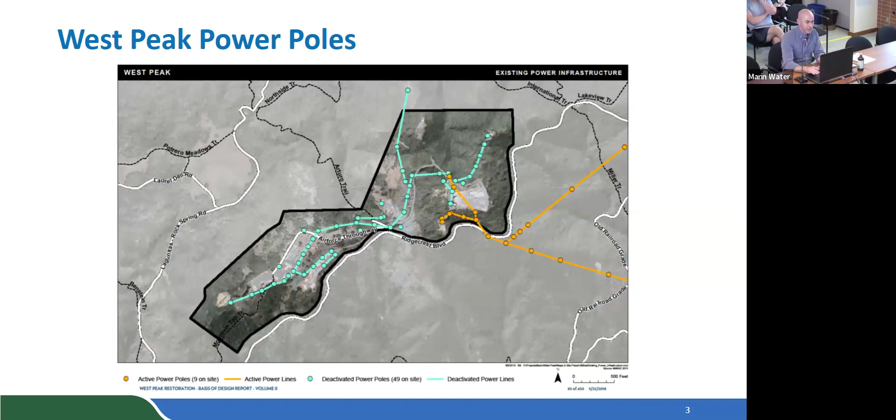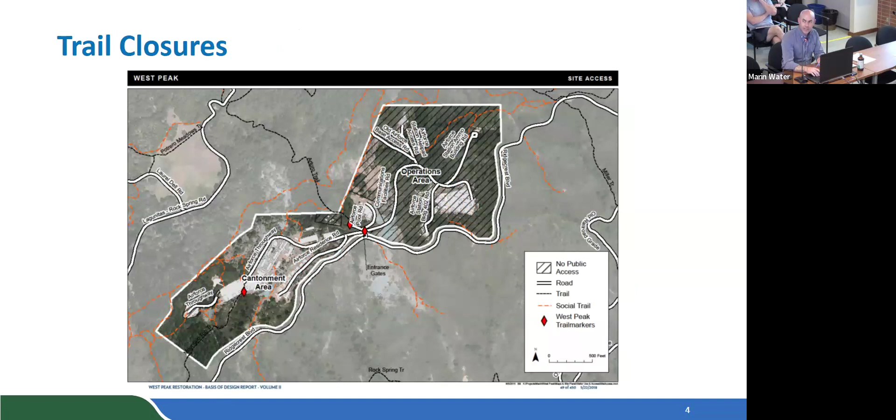Due to scheduling, we had to look at doing it on weekends in order to get it done as soon as possible. This site's been closed though, because there's a number of trails. They're kind of hard to see, but the black dashed lines are trails that go into the West Peak site. The red-orange hashed lines are actually social trails that people also use to go in and out of the site when they're exploring up on top of the mountain.

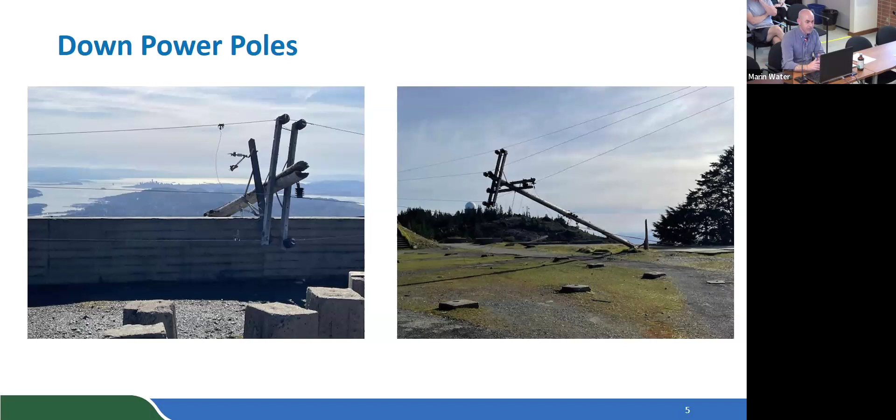Due to those wind events, we had a number of these poles come down. This is really old infrastructure that's been up there for a long time. A lot of these poles are just failing in the middle—they've rotted out. They really need to go.

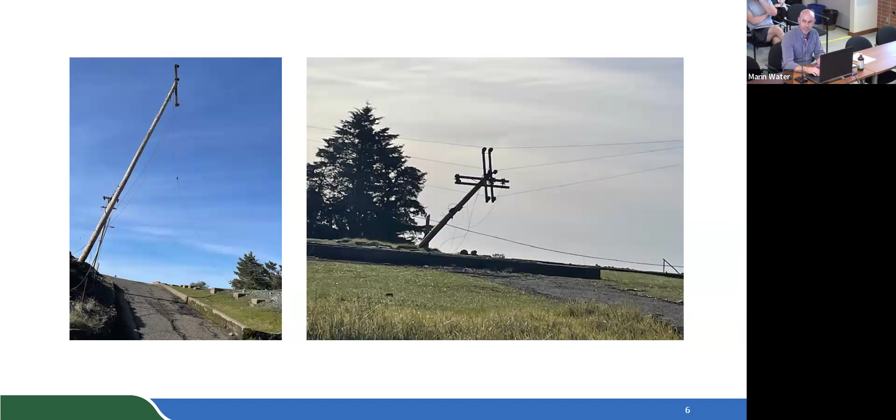So we have a number of down poles and others that are teetering on becoming down, and all of this infrastructure is kind of a tangled mess up there right now. We're trying to move forward with the repair to make this site accessible again to the public and make sure we get this infrastructure and hazard out of the way as soon as possible.

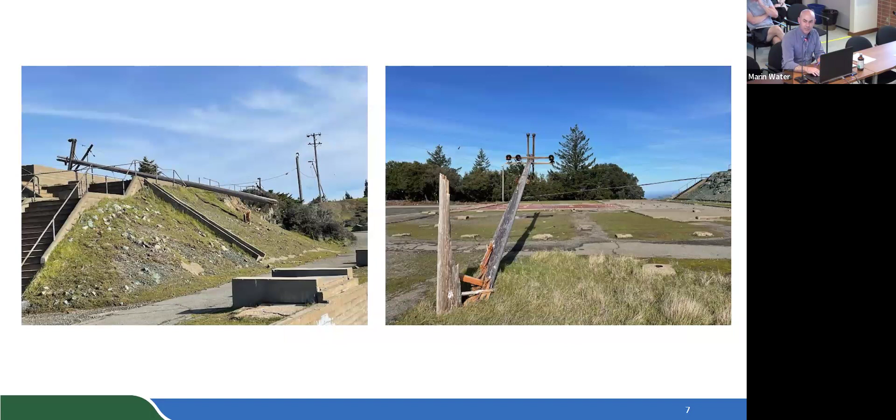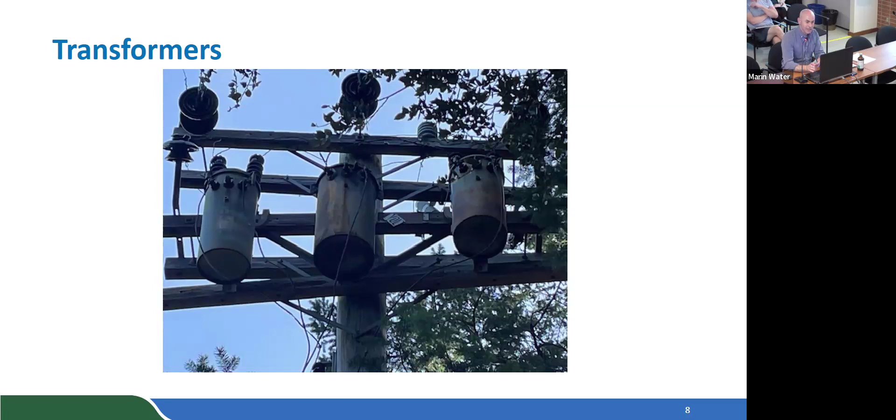There are also transformers that we're going to have to deal with that are beyond what the contractor removing the poles can handle, because of the hazardous nature of the chemicals used inside the transformers. So we're looking to contractors that can actually come and transport and dispose of those accordingly.

The schedule for the project right now is to start on Thursday with the removal process. It's going to take two crews initially removing it, and then following up on the March 30th weekend to complete the removal. We're hopeful that those two events will get all the power poles down, all the lines wrapped up, and the transformers secured and placed in a secure spot until we can get a contract in place to remove those permanently from the site.

We're also working with the contractor to see if they can sub-consult with another contractor to help with removal of those features as well. So there are a couple more steps until that site is open again: soliciting proposals for the transformer removal, and then contracting and scheduling that work to be conducted.

So with that, if you have any questions about the project and what we're trying to do with this contract, we can answer those. Otherwise, as I mentioned, this is an action item requesting that we adopt the resolution to allow us to utilize the emergency contracting procedures with Pinnacle Power Services.

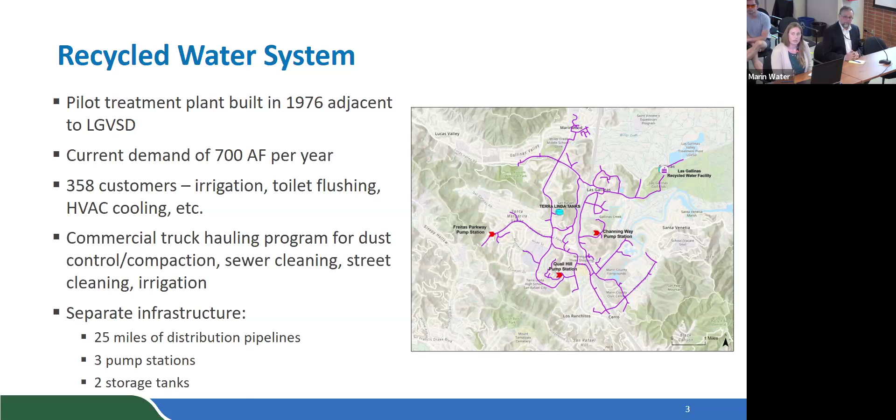Ways to expand the system from the existing 25 miles include first infill, adding new customers within that area. Sometimes opportunities come up with customers adding to the system or changing their use, and we find ways to transition them to recycled water. Other opportunities involve expanding the recycled water system through a phased or project-based approach, beyond the bounds of our current system. Lastly, we could add a new recycled water system centered off a different treatment plant—right now we're centered off Las Gallinas, but it could be through Central Marin or SASM down in Mill Valley.

For infill, do we have available capacity? Yes, we do. With the new recycled water facility that Las Gallinas upgraded, we have quite a bit of capacity that they can produce from their treatment plants, and we're able to meet any infill demand right now.

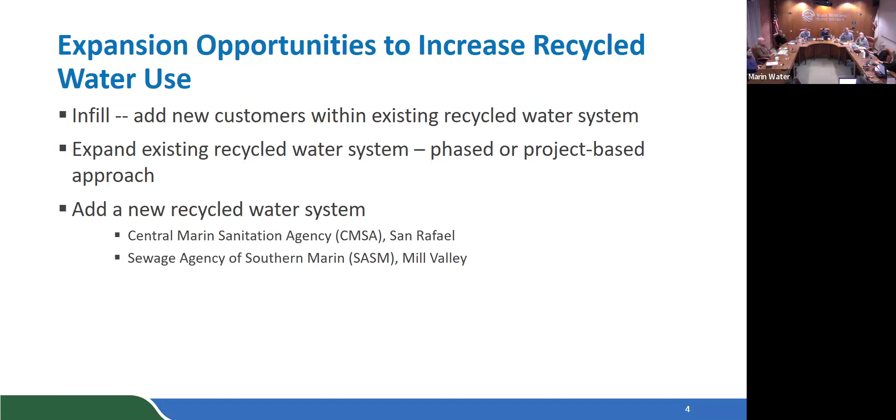Our partnership with Las Gallinas has been ongoing since our inception in 1976. In addition, we're always looking at ways to expand the system using other wastewater facilities in our service area. We partnered with SASM, the Sewage Agency of Southern Marin in Mill Valley, in 2014, and with Central Marin Sanitation Agency, CMSA, in 2015 and 2022, to conduct feasibility studies for recycled water and identify the most cost-effective projects in those areas, building off their treatment facilities. We continue to look for opportunities to expand the recycled water system, mostly through leveraging grants and these partnerships with wastewater agencies.

So there's infill within our system, or there's also starting to look beyond. Phased expansion is one approach we've looked at over the years, growing through phases to become more cost-effective in how we expand the system.

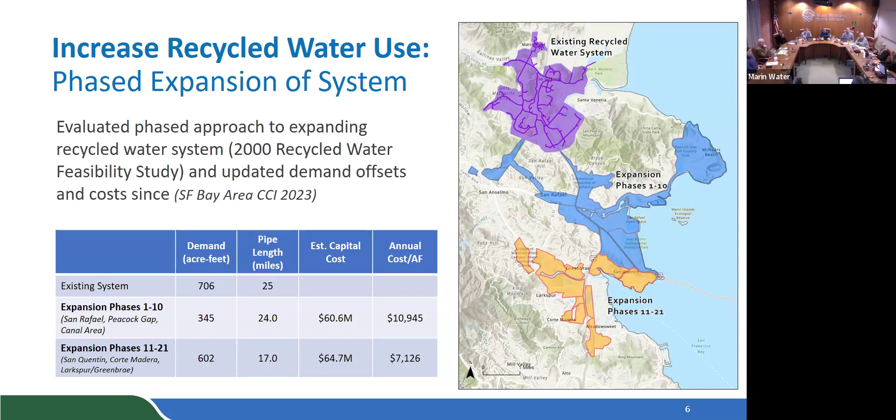So what we see is that it's expensive, due to the residential nature of our county, to expand beyond the boundaries of where our system is right now. But we continue to look for opportunities.

So another way we go about it is by looking at specific projects.

Lucy, another interruption—I always get confused on the calculation of annual cost per acre foot. So the capital costs are being amortized over the lifetime of the system, and you're also including the operating costs? Correct. Over 30 years, I think at 3.5% or so, based on what we would expect we could get. Thank you.

Is that assuming the causeway that the park people asked for? No, that ended up being the most cost-effective option that they looked at in that design study, I believe it was West Yost, and the most cost-effective one ended up being going through Central Marin and then over along San Pedro. That was because they could pick up the most users. I think the causeway ended up not being feasible because the state park said they wouldn't allow for it. I thought they were the ones that asked for it to avoid the Indian burial. They liked the idea of the causeway, but they were not so keen on us going overland to the Peacock Gap tank that we proposed to use. So there are some mixed messages there.

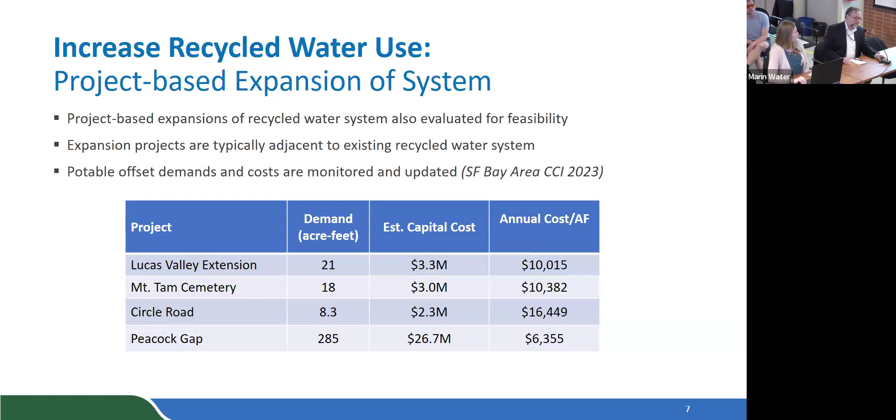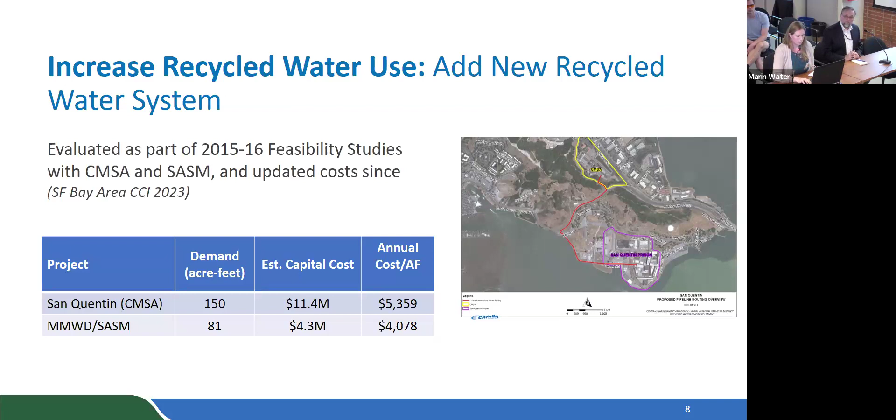So bringing all of these together, what you can see is there's definitely the possibility to expand and increase recycled water use. But it comes with a cost, with very expensive capital costs to do these projects. And they're very supply limited in consideration of the water supply roadmap that we're working on and the supply demand that we're looking for overall.

And so that's also why we're starting to just keep in mind the future of potable reuse. So with potable reuse, I'll step into a brief overview: there's two primary categories. There's indirect potable reuse, which is the planned use of recycled water to replenish drinking water supplies, but using an environmental buffer. That primarily comes through either a groundwater basin as the environmental buffer or a surface water reservoir as the buffer, and it's held with either a dilution or an amount of time where it's put in that buffer. For us in Marin, there are no available groundwater basins that seem feasible, so we don't see groundwater recharge as a good option. But surface water augmentation is an option to look into.

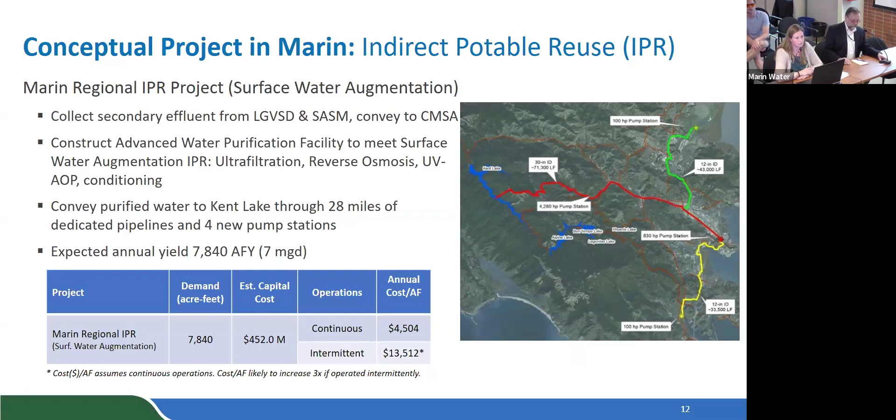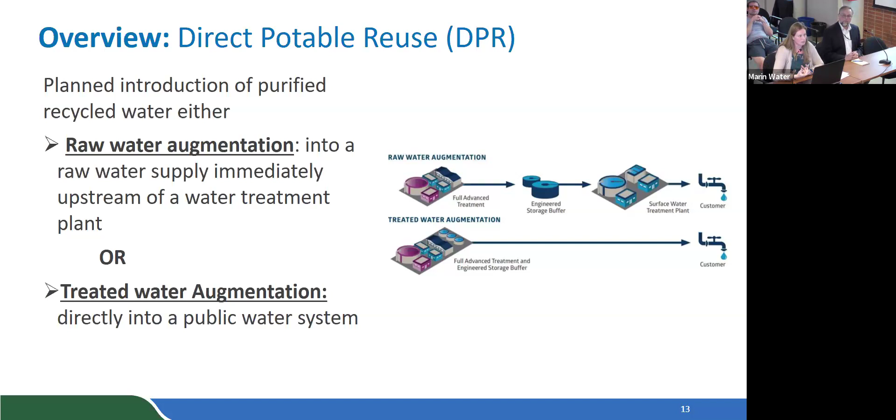I tend to think of DPR as treated water augmentation more directly, where it's put directly into the distribution system. But there's also raw water augmentation, where it's put into a raw water supply immediately upstream of a treatment plant. The graphic on the side shows it as well, and either of these have been evaluated for Marin.

When I came in November for the ops meeting, the draft regulations were underway and they had a public comment period. The California State Water Resources Control Board adopted the regulations in December, on December 19th. They were estimating at that time the effective date would be the second quarter of 2024. There hasn't been much updated on the website yet, so we'll see where it goes, but I expect it'll take some time for them to get caught up.

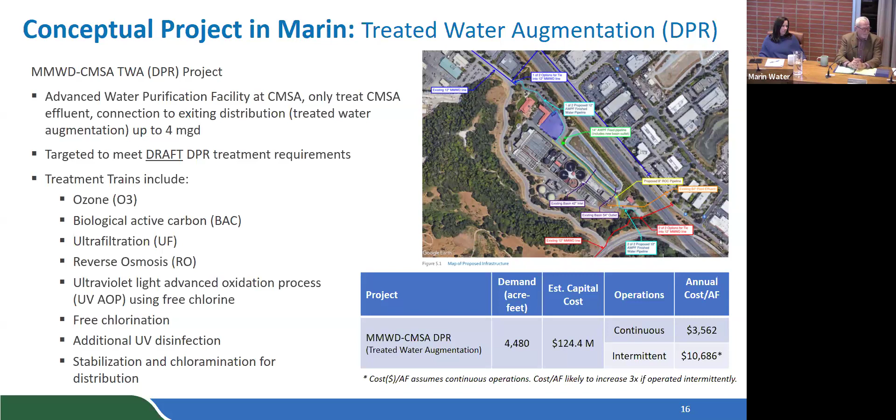So in summary, expansion of Purple Pipe is definitely possible and comes with costs. It's capital intensive, and from what we've seen, it's supply limited, mostly because of the way our community is built, with it being highly residential, and we don't have any large anchor tenants that are industrial.

And then with potable reuse, those opportunities down the road will be cost intensive and extremely complex, but will be interesting to see where it goes from here. So where we stand is we look forward to continuing to monitor the regulations and larger agencies, as Ben mentioned, and see how the regulations may change in a few years, and where we end up down the road, and what our options are in the next few years.

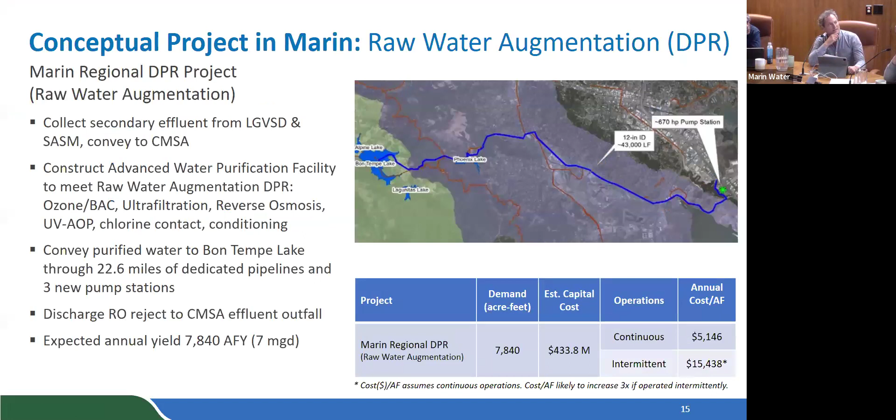Can you pull up the slide where you showed the options for IPR, that had about 5 or 6 different considerations and the approximate cost and annual cost? For the tertiary, the expansion of the purple pipe, I think it's like that one there. Yeah, so as I'm looking at these considerations for us to continue to research,

and given our water roadmap that we have approved to continue to look at this, and especially to find new grant money, I am supportive of us pursuing the SASM effort, that we can look into how those customers, whether Mill Valley or SASM, could potentially benefit and potentially contribute, whether there might be additional state or federal funds to help us do that project.

I think the costs that you have here are more expensive than some of the other options that we're looking at, but they also don't necessarily take into account insurance against drought, where we were scrambling before and coming up with extraordinarily expensive solutions, and may not take into account other additional infill expansions that site has beyond Friends Field and Bayfront Park, potentially to the Redwoods, which is nearby, and other developments, or the high school, which is also not that far away, which has some big fields, which I do not believe was using it.

So I do think there are some further explorations that we could have here, and I would like us to make some efforts to continue our recycled water work. I also think there might be interest in San Quentin and Peacock. I think there could be opportunities in Peacock in particular, for public, private, and other nonprofit support for that effort that may reduce the costs. And I wouldn't mind us reopening those conversations, which I think could be mutually beneficial for a lot of people, potentially the canal as well.

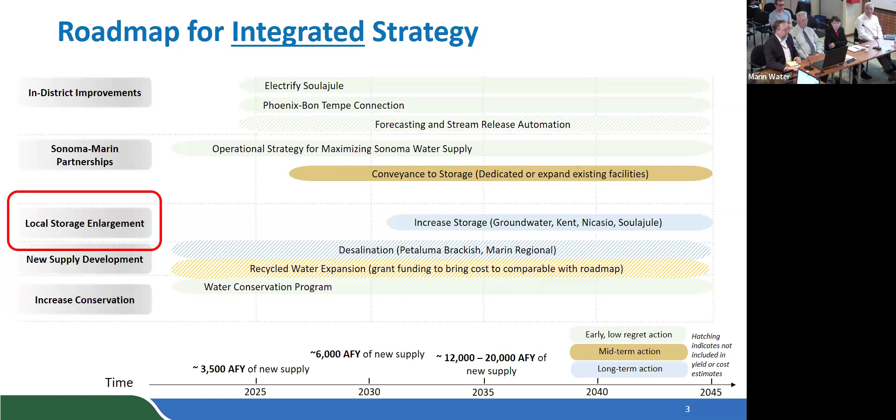I know folks may be watching online or attending in the audience, and even though I'm not talking about many things we're doing right now, in the interest of time, we're going to focus on this local storage enlargement. But I assure you, water conservation is first and foremost in our minds, even though it may be at the bottom of the slide. We just heard a presentation on recycled water and the board's comments on partnerships, grants, and game-changing things needed to move those projects. We are interested and moving in all areas on the roadmap as quickly as we can. So with that, I'm going to pass it over to Guylaine to walk us through the next couple slides.

Thank you, Paul. There you go. Thank you.

Thank you, Paul. If you recall, the process we're going to go through for local storage evaluation is first we are going to define the alternatives as described in your strategic plan, but define them to the point that we can screen them down to 3 or 4. Then we'll further develop these shortlisted alternatives to conceptual design, and based on that, we'll come back to you with a proposed preferred alternative for design.

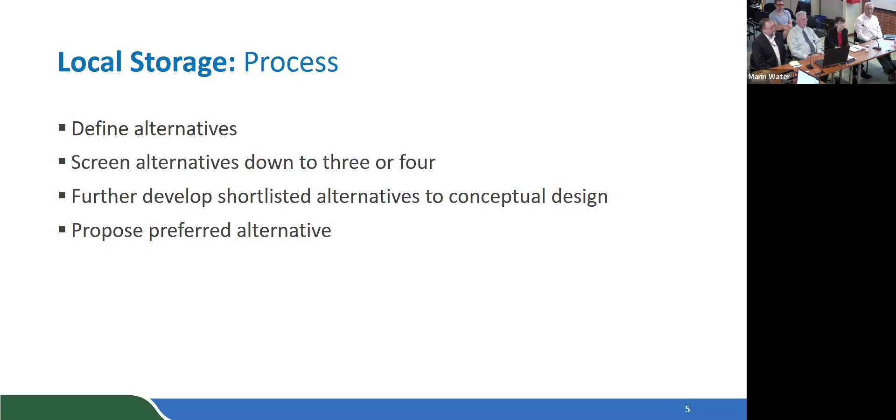In terms of progress to date, as I mentioned, we are defining the concept laid out in the strategic water supply assessment to feed into screening the alternatives down to the top 3 or 4. We have done site visits and reviewed all the records. Our purpose was to understand the geometry of the existing dams and spillways and the opportunities for enlargement and expansion, as well as understand the construction material availability and characteristics.

Are there any more materials that we can use to build these dams? We evaluated the local geology and the geologic hazard, established limits for the new incremental inundated areas, and then defined site constraints. That process led us to identify new alternatives as well as sub-alternatives.

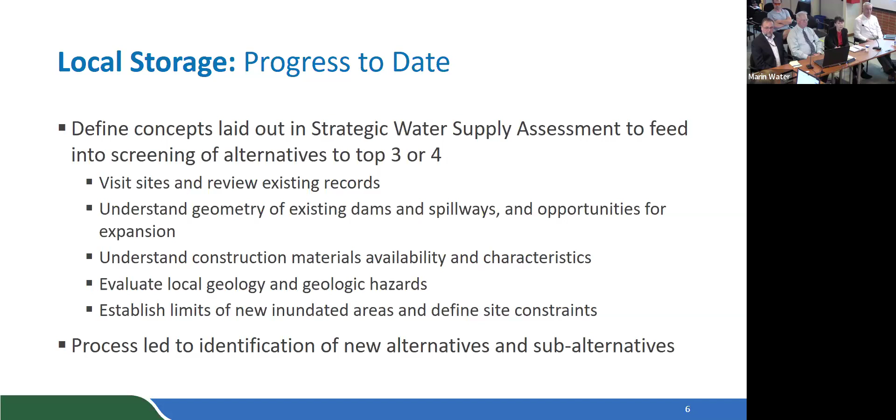Bob will go through these in a minute, but this is what we're going to be looking at. We have Soulajule, of course, but now we have 2 options for Soulajule. We have Kent. We came up with Alpine as a new possible alternative, which came about when we were looking at spillway gates for Alpine, and that's how we found the opportunity to raise Alpine. We also talk about Nicasio, then new reservoir construction, Devil's Gulch, Halleck, but also Upper Nicasio.

This is a new reservoir to the northwest of the existing reservoir. We'll also touch on new spillway gates, in particular for Nicasio, but also Soulajule, Kent, and Alpine. So with that, over to Bob.

Good evening, board members. Can you hear me okay?

All right, we're going to start with Soulajule, and just a quick recap of what the existing facility looks like. This dam was built in 1979, so fairly modern construction. Just some common elements we'll talk about in the other dams: of course, every dam needs to have a spillway, usually put in one of the abutments of the dam. There's an inlet and outlet works. The inlet for Soulajule is up here on the point, and the outlet is down here at the pump station.

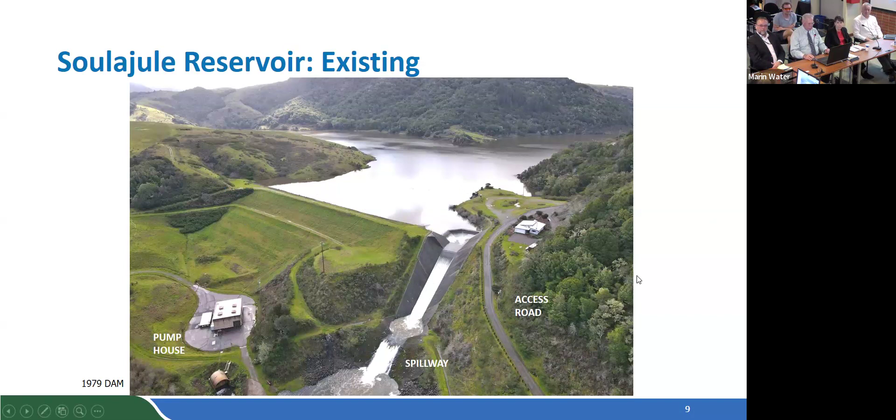Soulajule and the other embankment dams are what we call zoned embankment dams. This darker outline is the existing Soulajule, and there's internal structure to these dams—that's why they're called zones. There's coarse material on the outside, typically called the shell, which would be gravel or larger size rock and sand.

These provide stability and strength for the embankment. The water retaining part of the dam is called the core, typically a clayey material with low permeability. Very often you also have to seal the foundation under the core, so there'll be a cutoff zone where they extend the depth down to good rock. Many of these dams also have a grout curtain.

For raising Soulajule, we first looked at a downstream only addition. The advantage of this kind of construction is you don't have to disturb the existing dam very much. You can keep the reservoir in operation while you're building the new dam only on the downstream side.

So again, we have to have the same elements in addition to the core. There's drain material to help drain any water that does seep through the core, and that exits out to the toe. So all these elements have to be extended up in the new dam.

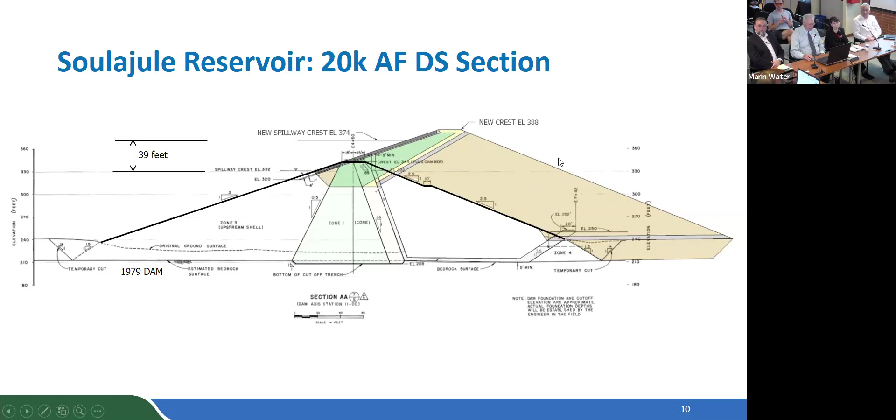When you do the downstream only option, you can see that the crest of the dam, which used to be here, is now moved downstream quite a ways. That has an impact on the embankment. It also puts the core out over new material, and for example in a seismic event, if this material were to settle, that could compromise the core and lead to leaks. That means this downstream shell needs to be constructed very carefully.

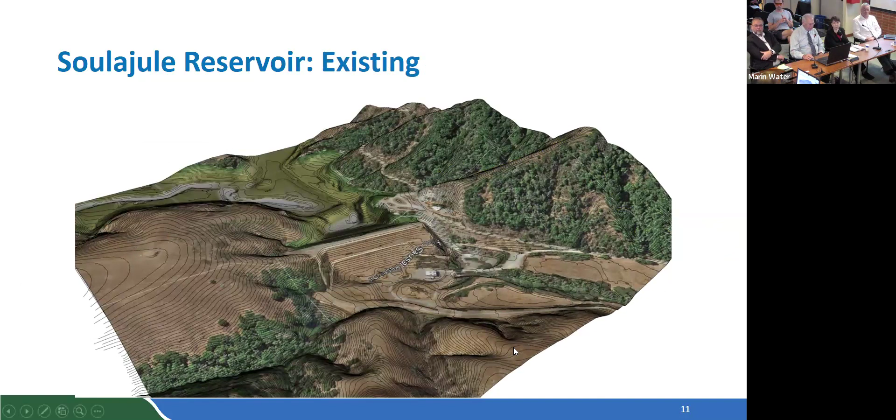Here's a model of the existing dam. I wanted to show you the transition so you can see the difference with the new dam. I should have mentioned, to raise Soulajule to get the 20,000 acre foot target, we're looking at about 37 to 39 feet.

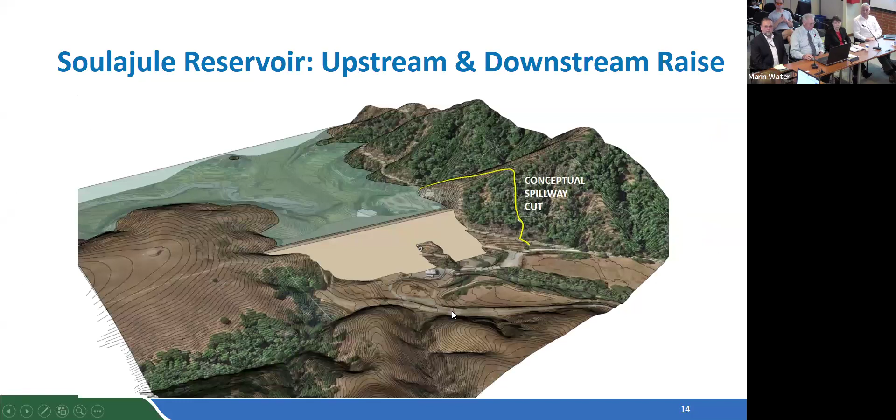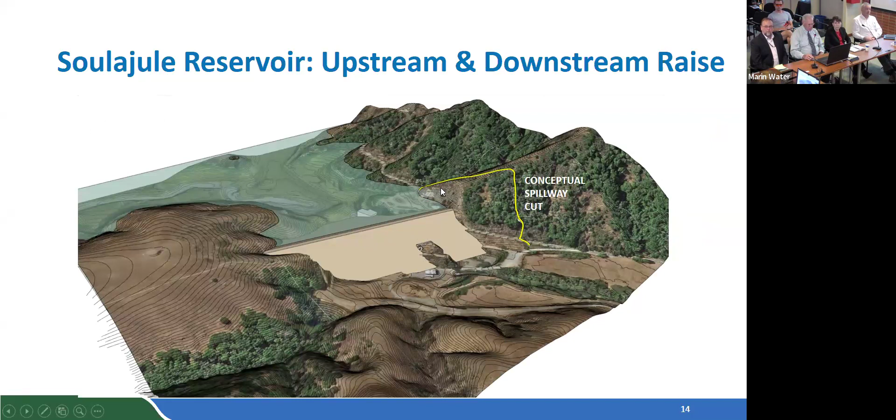You now have a thinner shell upstream and downstream. Here's what this balanced upstream-downstream embankment could look like. You can see the pump house probably could be spared here just by putting in a small retaining wall, so those facilities would not be affected. The cut for the spillway is also much smaller because you have a better alignment for the new spillway.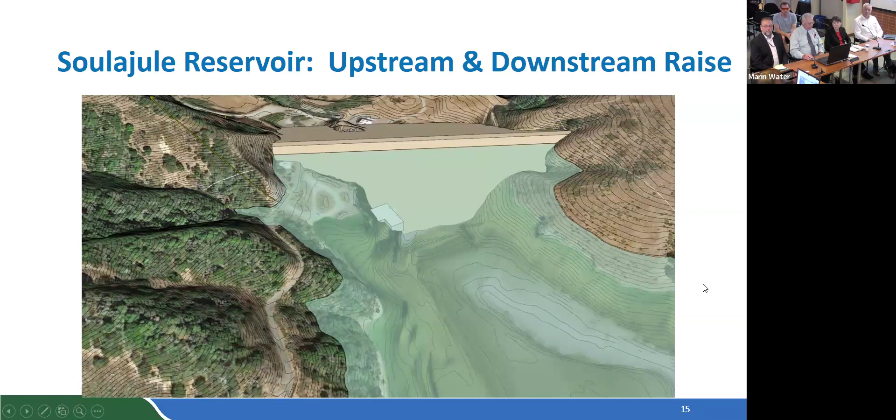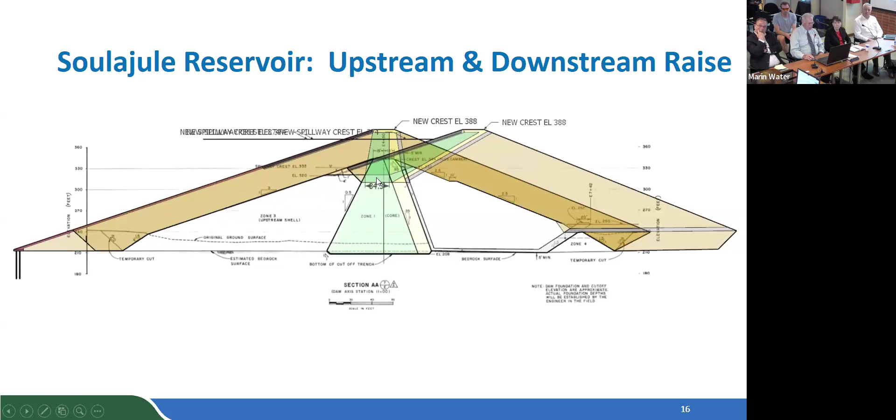Just comparing the upstream and upstream-downstream options, you can see how far downstream the downstream only option moves the dam axis. Here's the inundation map for the new reservoir at the spillway level, and you can see the upper reaches of this reservoir where the terrain becomes pretty flat. So quite a bit of additional area would be inundated for Soulajule.

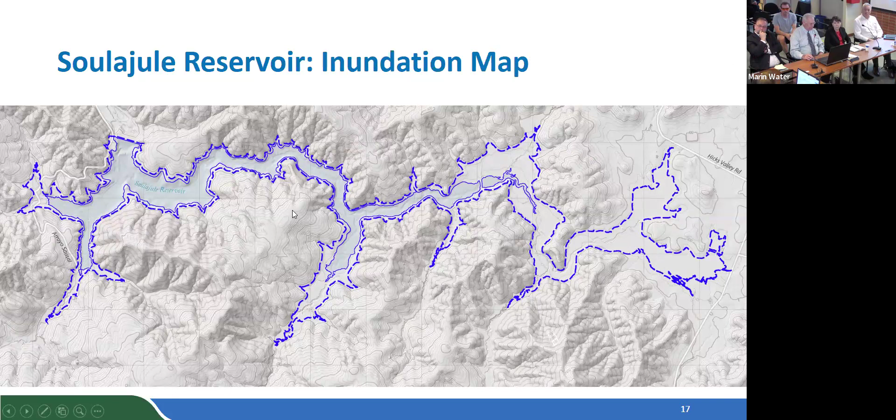Here's Kent Reservoir, Peters Dam. This dam has already been raised once. The original dam was built in the early 50s, and this dam was raised in '79, '80, '81. You can see the original spillway of the early dam is still in place, used as an outlet for the existing reservoir. The new spillway was moved up further on the abutment. This is a pretty good example of what these other dam raises would look like - you'd have a new spillway, possibly using the old spillway for an outlet.

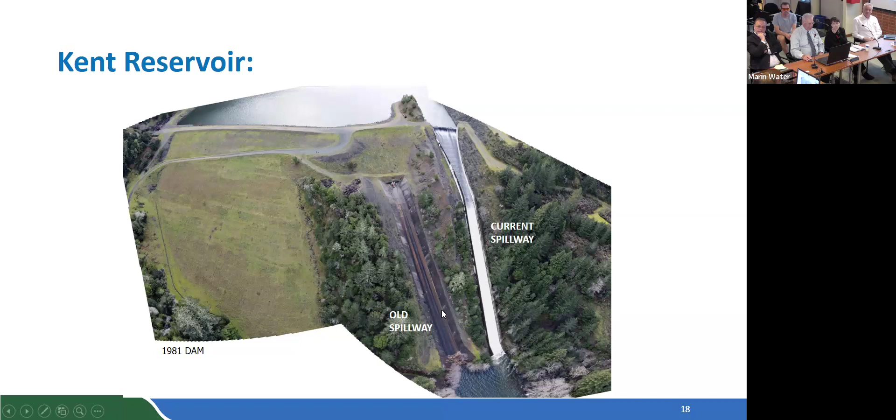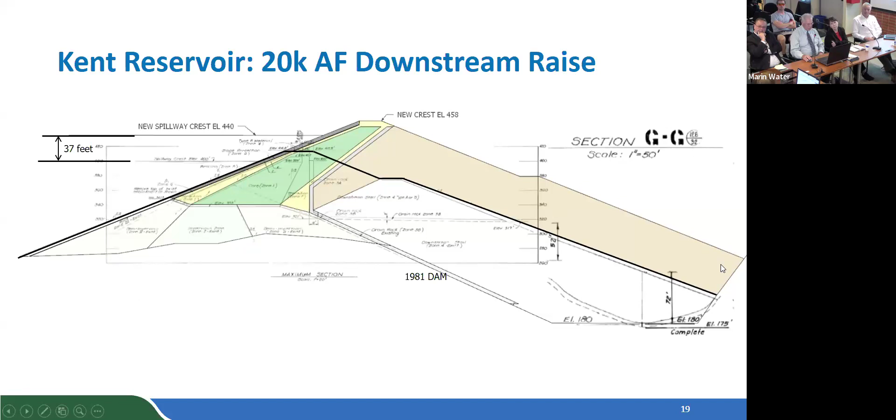Here's the cross section. You can see this is the original dam as the dark outline. This dam was built, the raise was done only in the downstream direction. So you can see the original core was in here, the axis of the dam and crest. The existing crest is here. And if we were to continue to move this downstream with a downstream raise, the axis moves even further downstream. This is a big dam. It's a tall dam and pretty wide. So we're looking at a lot of material for this raise.

Here's the existing embankment dam, the new and old spillway. This was the cut made for the spillway and also the quarry to provide material for the dam shell. And here's what the new 20,000 acre foot embankment would look like.

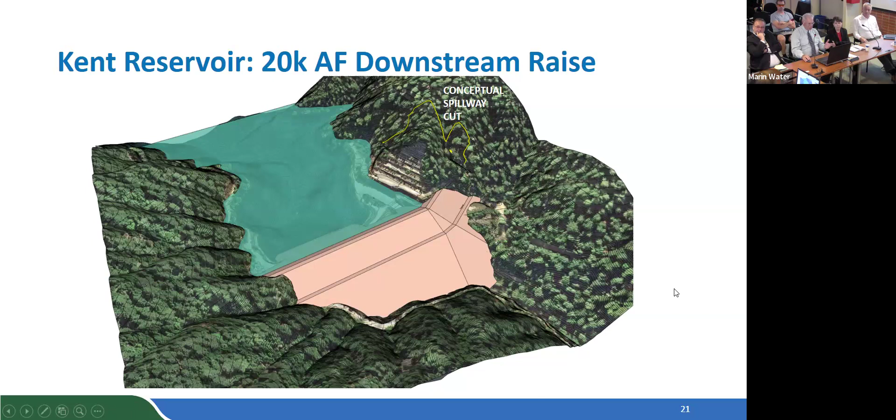A consequence of moving the axis so much further downstream is we've actually moved past the abutment ridge for the original two dams. If you were to project this axis out, the dam would actually go out into this ravine and would have to be quite a bit larger. So what I've shown here is kind of turning the corner in the dam. This is a much more complicated type of dam to analyze, and the dam regulators, DSOD, might look more skeptically at this kind of arrangement. The spillway would go through this cut, and then since it's also entering this ravine, that would have to make a turn. So this new configuration is quite a bit more involved.

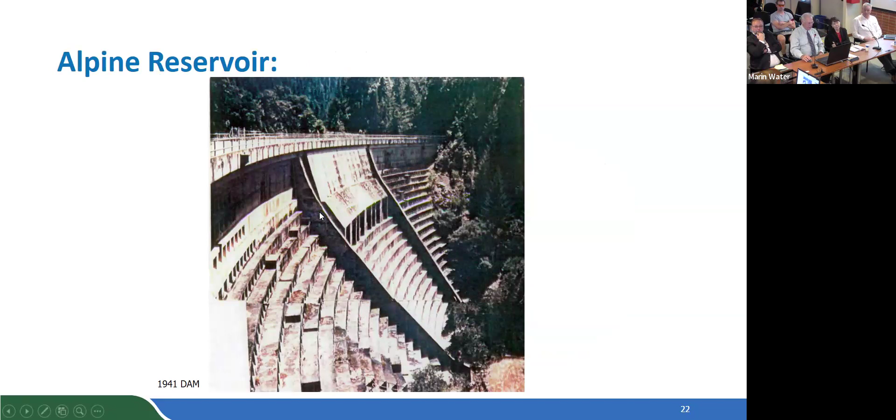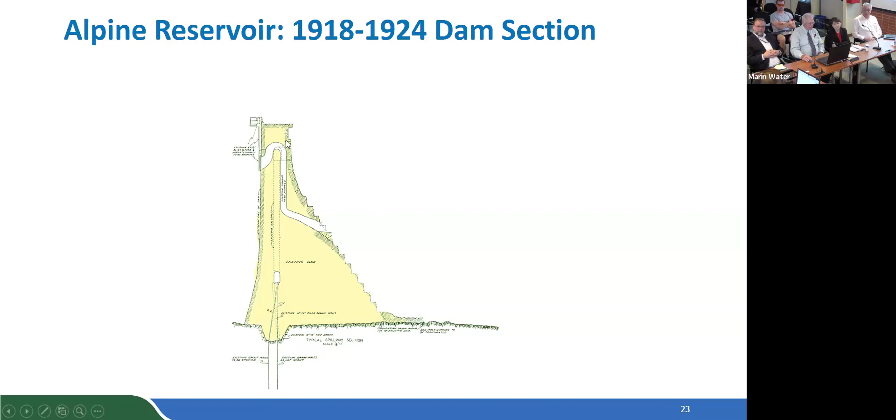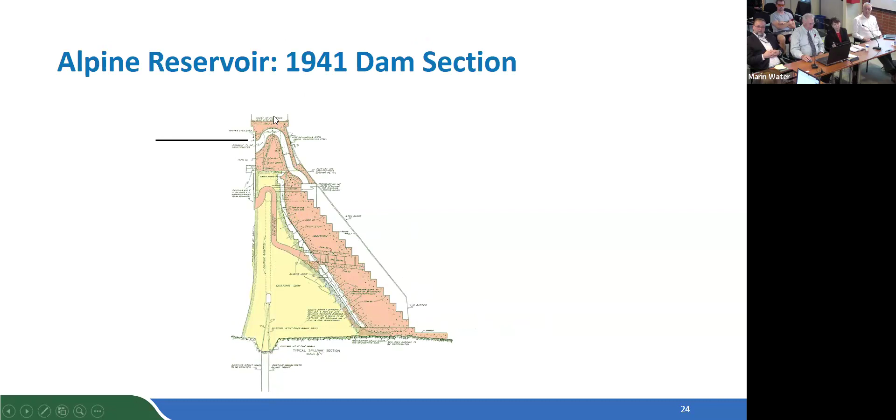Here's the Alpine Dam. What came to our attention was these steps in the dam, and these were mentioned in some of the early reports. These steps were put in place so that the dam could be raised at a future date. The dam we're looking at here was completed around 1941. An earlier dam was in place here, originally built in 1918, raised 8 feet. In 1924, they just added some additional concrete to the top. Here's the 1941 addition. So again, the earlier dam had steps left in it to be raised. This is the process for raising the dam that would kind of be duplicated if we raise it again.

Here's a pretty wide view. How do the steps affect raising? They give a purchase, or a place - it's just a step for the new concrete to join with the old dam instead of having a flat surface.

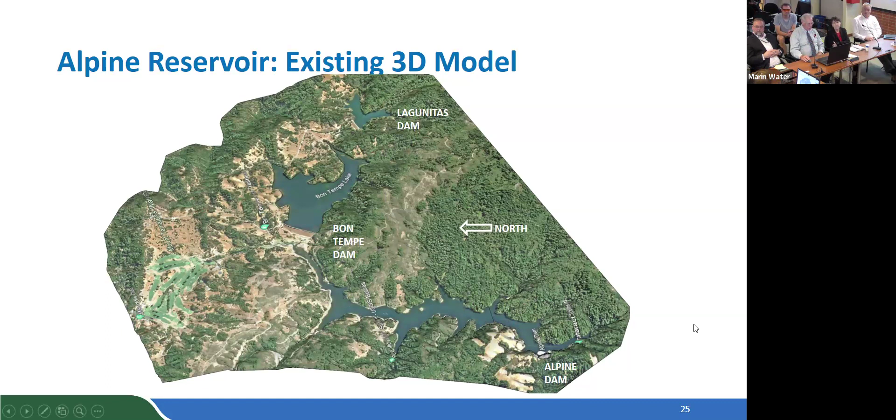So here's a wider view. Here's the Alpine Reservoir, Alpine Dam here in the lower right corner. We've got the Bon Tempe Dam and Lagunitas Dam upstream. Here's the existing reservoir. We first looked at, well, how far can we raise the reservoir before we run into the toe of the Bon Tempe Dam?

Submerging the toe doesn't necessarily mean that dam is compromised, but it makes operations more difficult. It may mean that dam would have to be reanalyzed and approved by DSOD. And the other problem we have is you start to run through the gap here, runs out into the area of the Meadows Golf Course. And if you start to raise it even further, it will spill out over this gap here. And that raise only provided about 5,000 acre feet of additional storage. So looks like that's a non-starter.

Next, we looked at how high do we need to go to achieve our goal of 20,000 acre feet. And that's what the reservoir looks like for that arrangement. If we put a saddle dam in this little gap here, that protects the area to the north. But now the Bon Tempe Dam is almost fully submerged, which is probably not good for the stability of that dam.

So once you're at that point, we looked at, well, why don't we just raise it even further and match the spillway of Bon Tempe Dam? And that yields 23,000 acre feet. Again, here's the saddle dam that contains the water before it goes over to the north. In this configuration, Bon Tempe Dam could be breached and you just operate both reservoirs together. Once you've breached this dam, it's no longer retaining water. You don't need a DSOD license. So the stability issues would go away there.

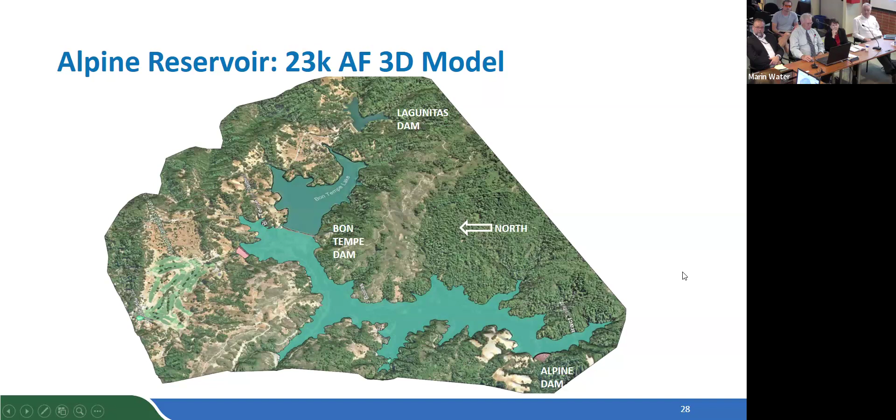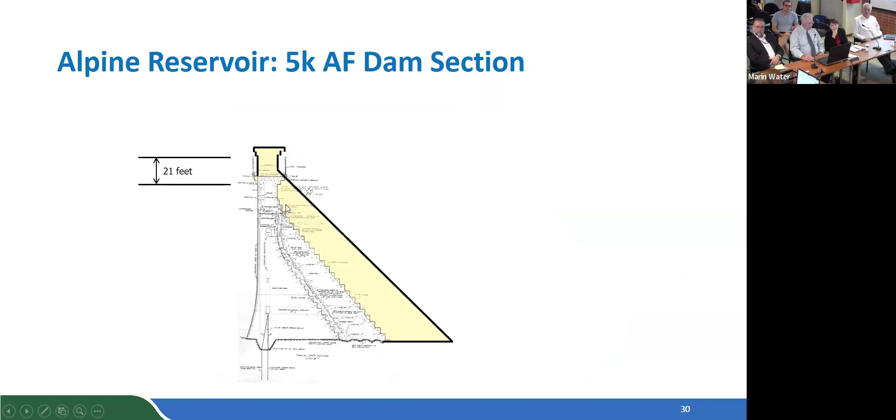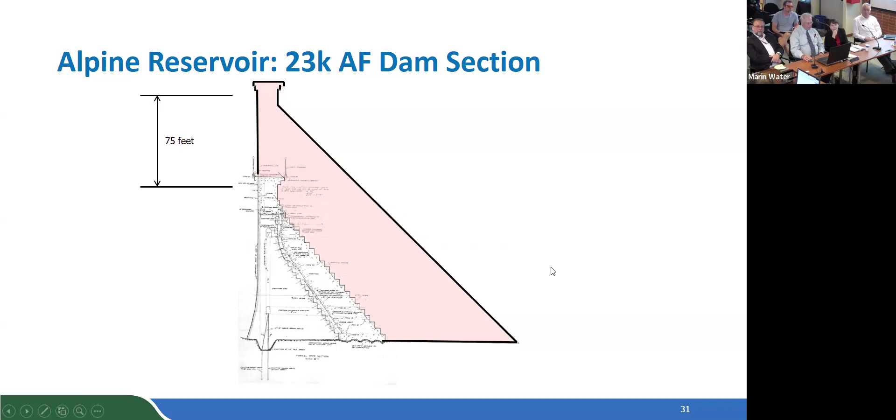Just quickly show you what the dam section would look like. Here's the existing dam - this is the 5,000 acre foot dam, raised about 21 feet. Here's what the 23,000 acre foot dam would look like, so it's quite a bit higher, 75 feet. The slope here is shown a little bit flatter than the existing dam. Existing dam is 0.8 to 1 slope. This dam is more in keeping with modern practice, about 1 to 1 slope or 45 degrees, but still a very small footprint compared to embankment dam.

You don't mention the Bolinas Fairfax Road. Would that be inundated? Is that the road on the top of the dam? Right, right, and it comes around the side of Alpine Lake. It would be inundated in parts. But I think they're relatively short. The road does go very close to the existing shore where it crosses the dam. And I think there may be another point to the north. Is that the area you're thinking of? Yep, yep.

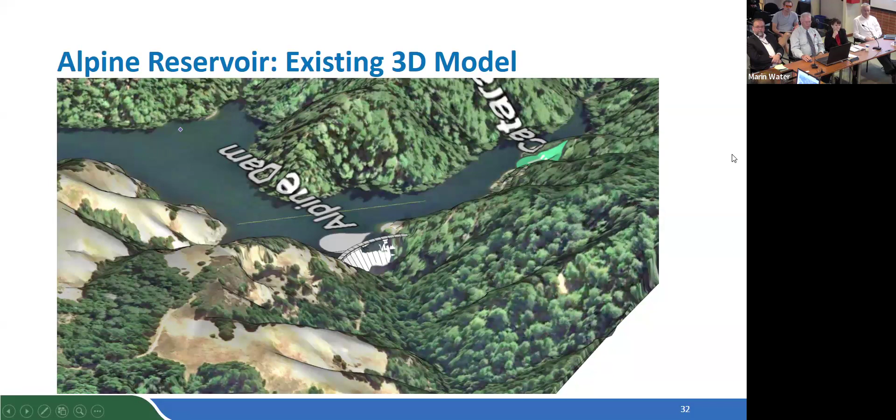So here's the existing dam and the new dam. Again, the footprint is relatively small. It is quite a bit higher dam and deeper reservoir.

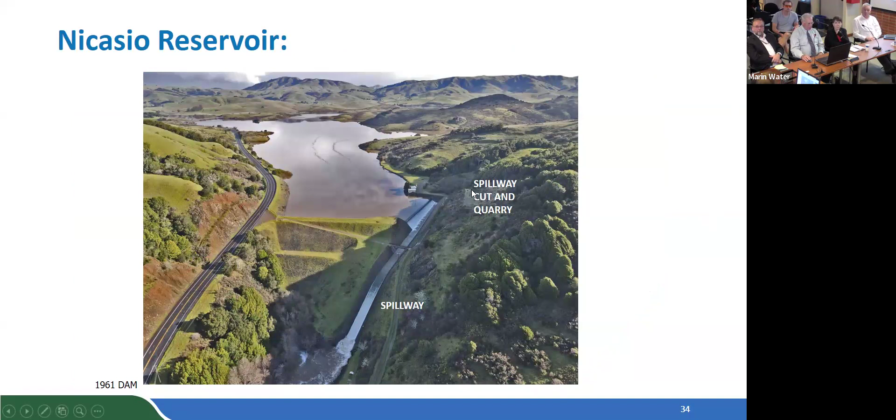Moving on to Nicasio Reservoir, Seeger Dam. This is a 1961 dam. Again, spillway on the left abutment, the quarry used for the embankment of the dam.

This is a much smaller dam. It's in a very good location, in a very narrow valley with a broad valley upstream. So you get a lot of additional storage with a small amount of raise. To achieve our 20,000 acre feet here, we only need 18 feet of raise. It's a small dam to begin with, relatively short and not as tall, so this one can be raised very easily. And the core is not extending out very far, it's over still the existing dam.

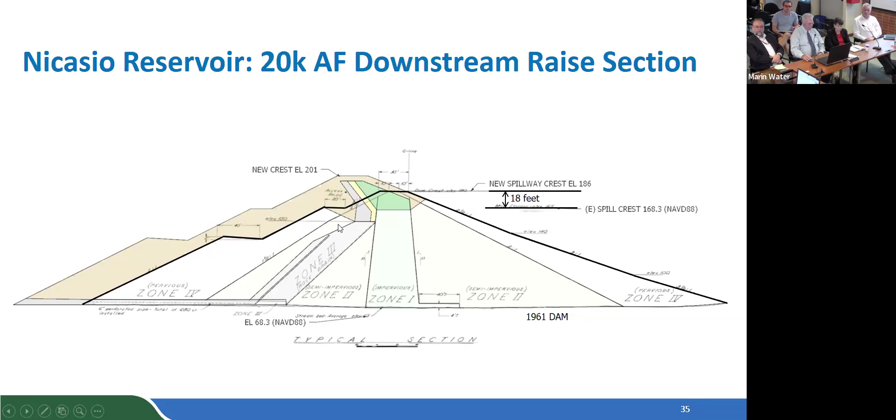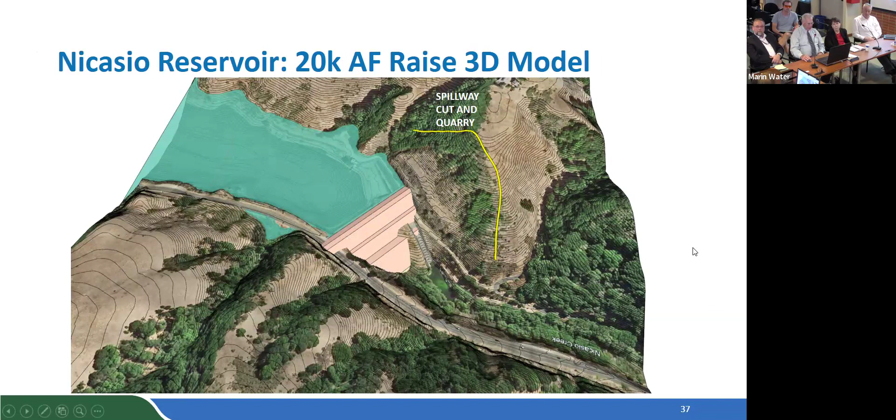Here's a summary of the four dam raises that we've looked at. These are all to the same scale, so it gives you a good idea how much material is involved and what the new heights look like. Of course, Alpine Dam has a much smaller footprint, being a concrete dam. Just a few summary details here, and the ones that stand out: the largest raise is required for Alpine Dam, just because that's a relatively small reservoir to begin with. The Peters Dam requires by far the most fill, 3 million cubic yards, almost 3 times as much as Soulajule would be. And Nicasio requires the most new inundated areas.

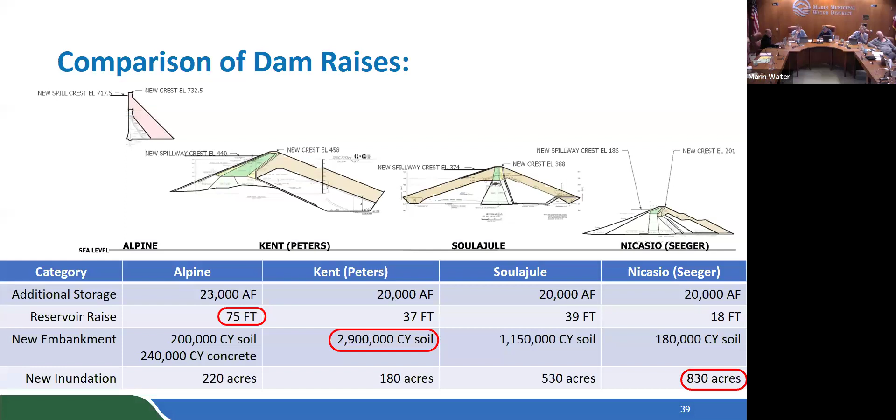Were there, if you can go back, with Nicasio, where they're inundating the town of Nicasio, that seems very undesirable. Were there cofferdam opportunities? I mean, that would take away from some of the storage, but is the very large footprint mitigatable by any sort of cofferdam? I assume you might have looked at that.

Yeah, we have looked at that. In fact, looking at that led to the idea of this Upper Nicasio Dam that we'll see in a minute. The issue around the town of Nicasio is there are two creeks coming into the reservoir, Halleck Creek and Nicasio Creek. So if you put embankments across those, you'd either have to put a pump station in to pump the water into the reservoir, or some kind of diversion further upstream and then a gravity pipeline into the reservoir. So it is possible, but it seems pretty complicated. And of course, you've got quite a bit of road that would have to be raised and rebuilt.

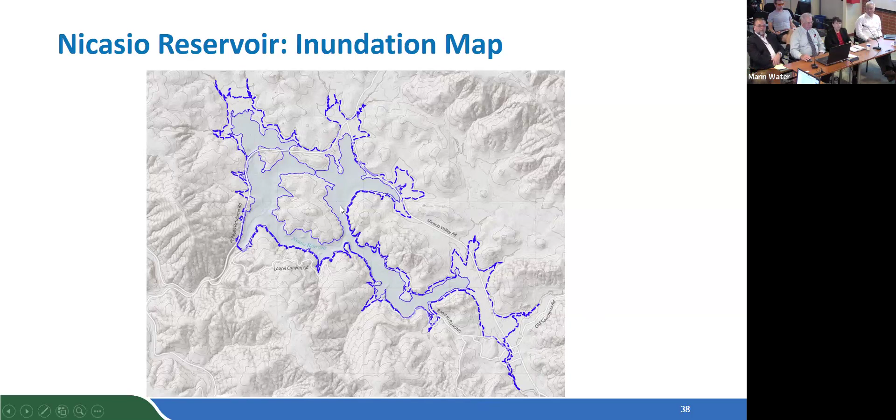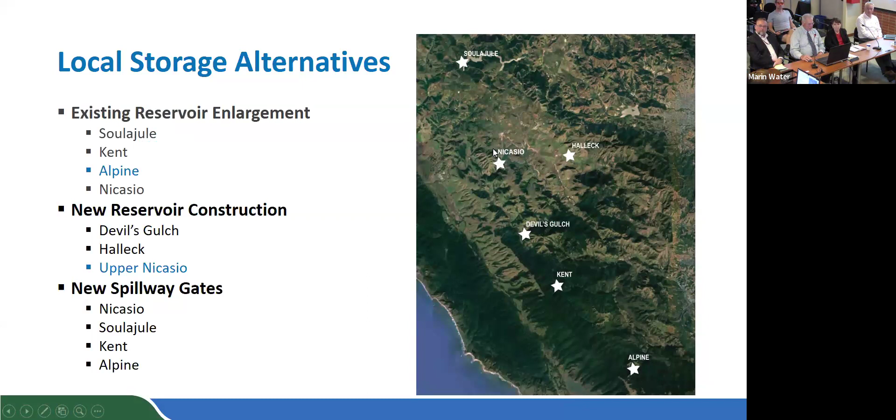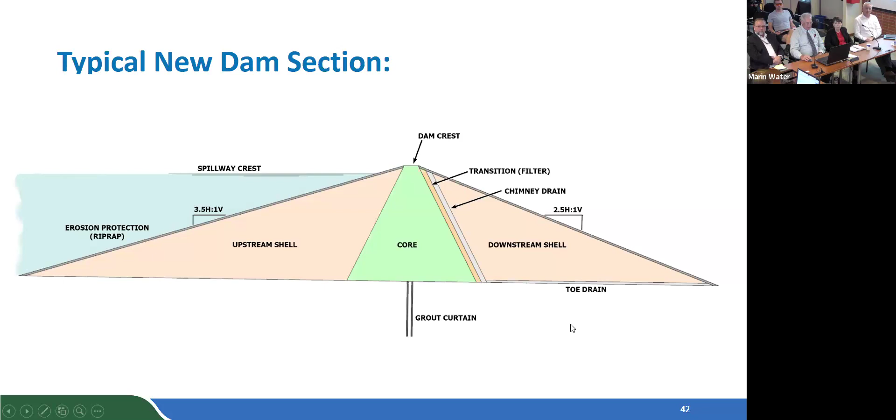Just briefly, again, this is the typical dam section we used. We use the same one for all the dams, so it's an apples to apples comparison. The advantage of a new dam over raising an existing dam is it's all new construction. You have your water barrier, your grout curtain, all installed as part of the new dam, and you're not having to modify an existing older dam.

This is what Devil's Gulch Dam would look like. It's quite high to achieve 20,000 acre feet, around 270 feet high. This is the county road down here in Lagunitas Creek, so this would be just upstream from there. You need a high dam because it's a narrow V-shaped valley, so to get the storage, you have to have a big embankment. Another issue here is there's very little room between the toe of this dam and the road. This is where your spillway would have to discharge, energy dissipation, things like that. So it's a tight space to put a dam in.

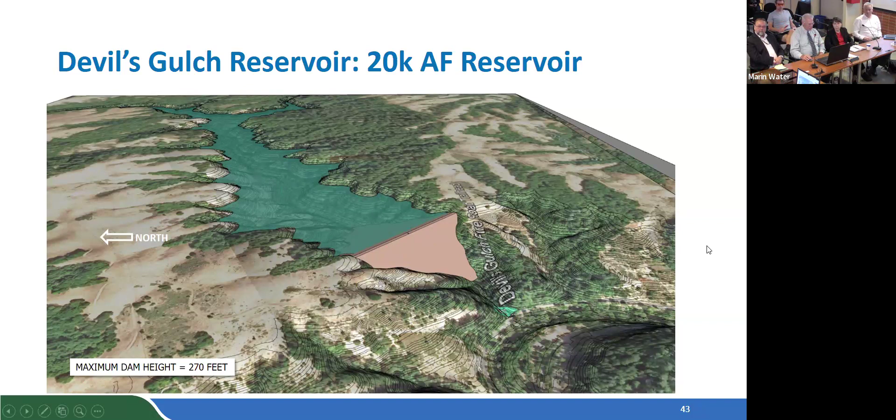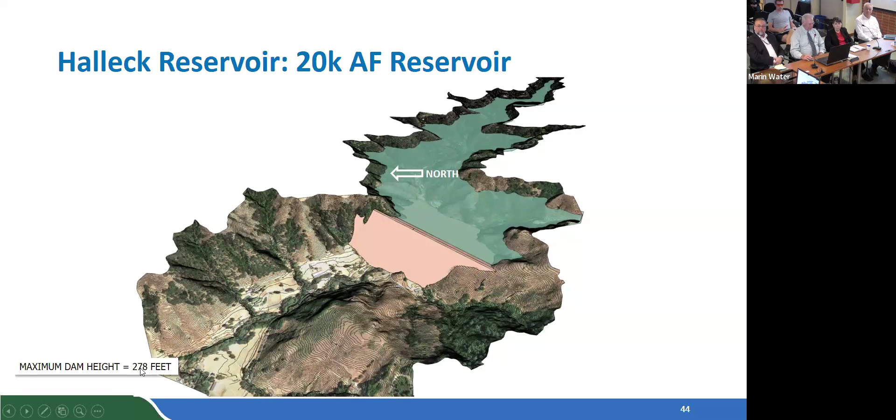Here's the Halleck Reservoir site. This is upstream of the town of Nicasio on Halleck Creek. There's a valley here with a ranch, and there's a couple of possibilities to put a dam where the valley's a little narrower. This one looked the most favorable. Again, it's a V-shaped valley, pretty narrow, so you need a very high dam to get your 20,000 acre feet, 278 feet high.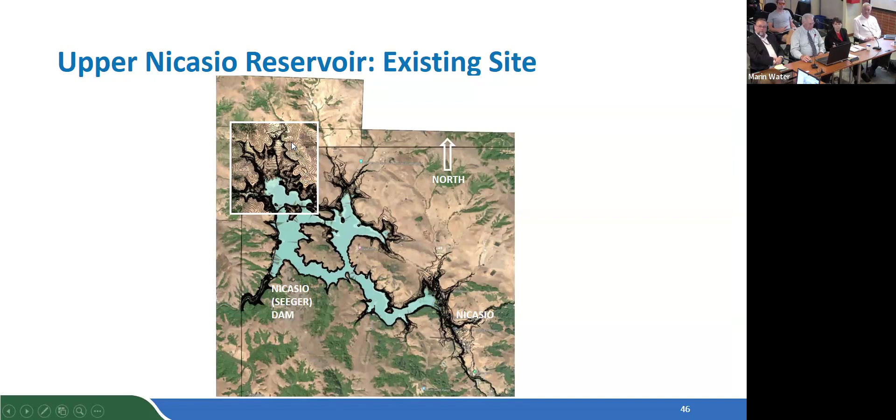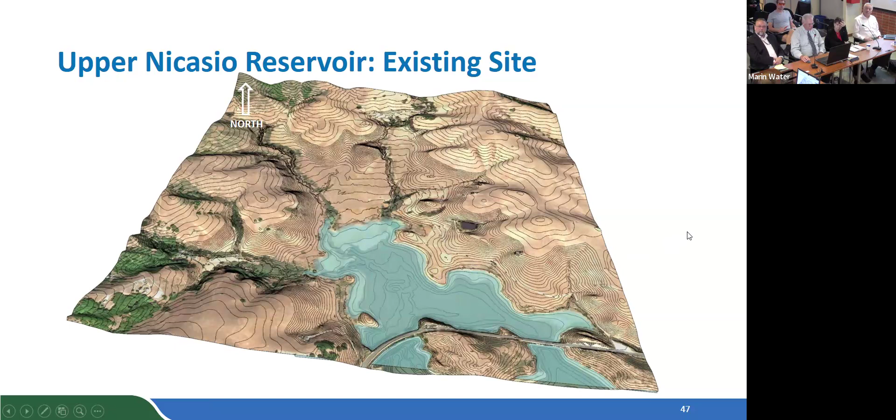There's a pretty broad valley with steep sides upstream from here. So here's the area we're talking about: the existing Nicasio Reservoir, the town of Nicasio over here, and the existing dam. We're going to focus on this rectangle in the next few slides. Here's the county road for reference, and this is the existing reservoir. Here's what the 20,000 acre-foot reservoir would look like. This isn't as high a dam as the others we've looked at—only about 100 feet high—but it's quite a bit longer because it's a broad valley. But the reservoir area is relatively small for the amount of storage we get.

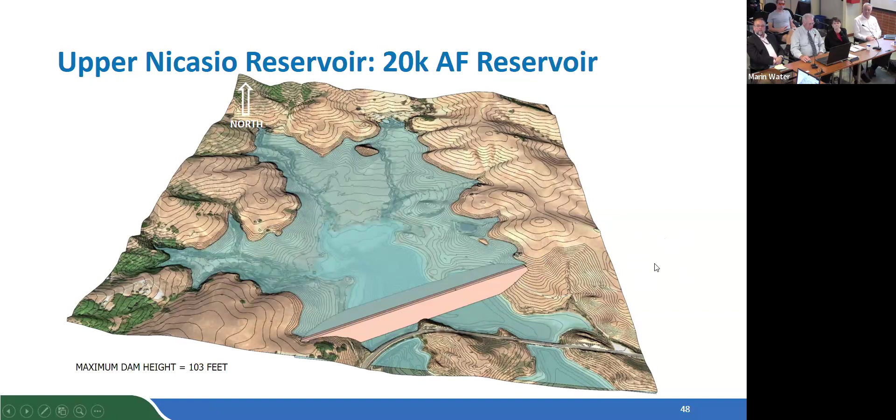Quick comparison of these new dam options. Again, here's the Upper Nicasio—not as tall, but quite a bit longer. The biggest dam by far would be the Halleck Dam, 10 million cubic yards. That's over twice as big as the other two we're looking at.

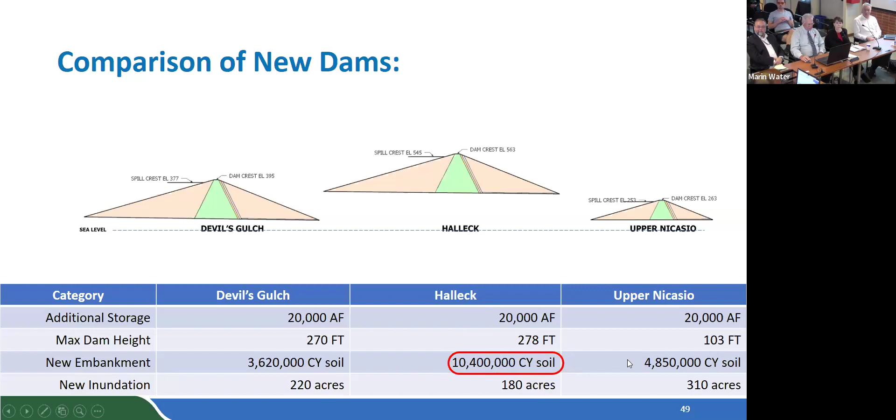Here's a quick comparison of all the dam options. The existing dams are shown with solid lines. This chart shows on the x-axis the height of the reservoir above the existing ground or existing reservoir, and here's the amount of acre feet you achieve. Here's our target, 20,000 acre feet, shown as this blue line. The better lines are over here to the left, meaning you achieve that extra storage with a much smaller dam raise. The new dams, by comparison—especially Devil's Gulch and Halleck—are way out here to the right. We mentioned the V-shaped valleys aren't very attractive for creating a lot of storage with a given height. Upper Nicasio is pretty good; it lines up pretty closely with Alpine and the other existing dams.

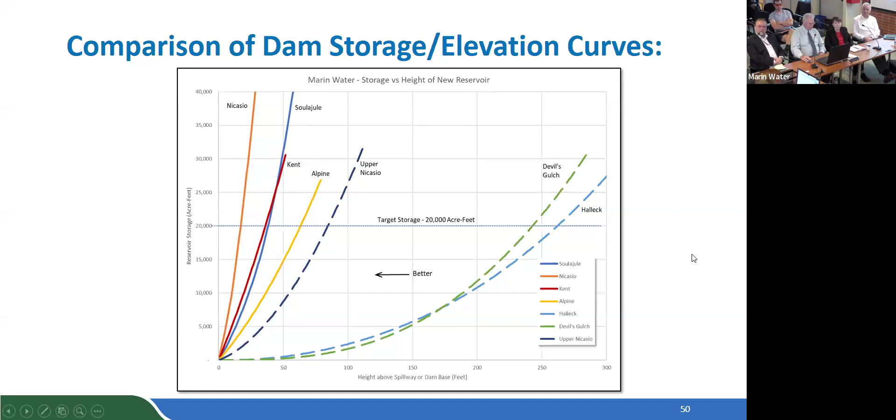I'm just going to talk about one of the spillways tonight because it's different from the others—that's the Nicasio spillway. Here's a quick photo of what we're talking about for flashboards. Flashboards are a relatively low wall, usually made of timbers with steel stanchions or posts to hold them in place, used to store additional water above the top of the spillway. Sometimes these are removable, sometimes they're trippable, meaning they can be released either manually or when you exceed a certain head of water over the top.

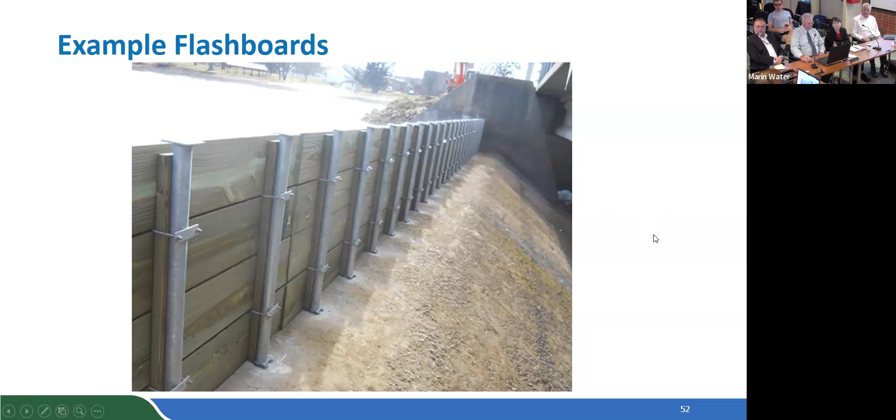So here's the Nicasio spillway. This is a side channel entrance spillway, which means it has a pretty long weir where the water flows over. This is a recent photo of it spilling. Here's the top of the weir. Like the photo we just saw, these flashboards would just be placed on top of this weir—probably boards with wide flange beams that are concreted or anchored into place.

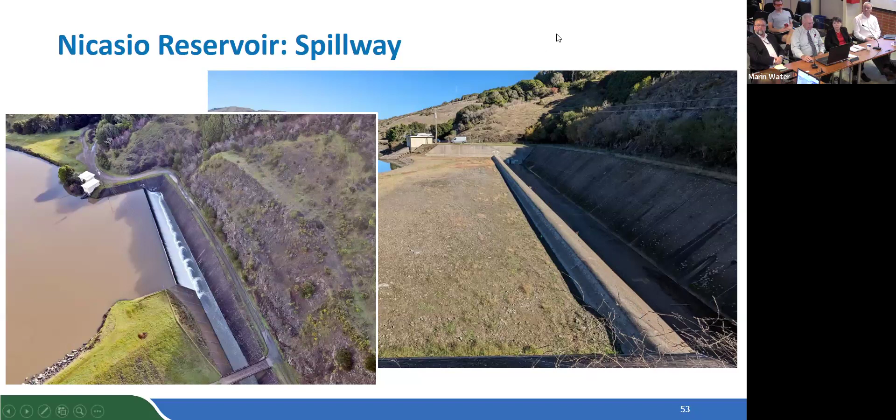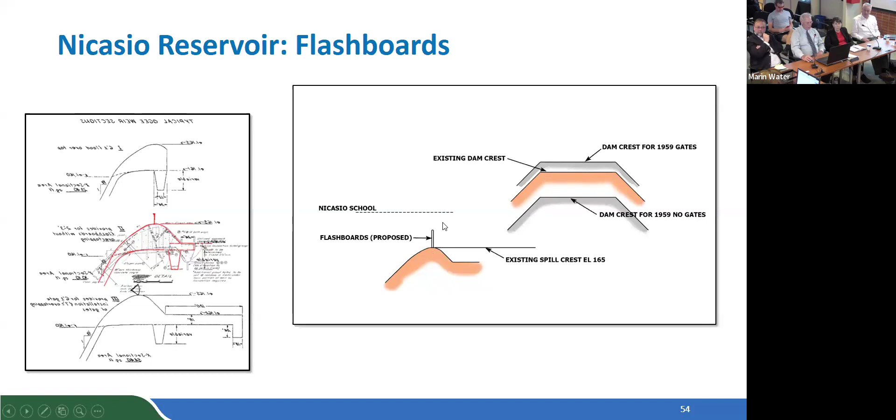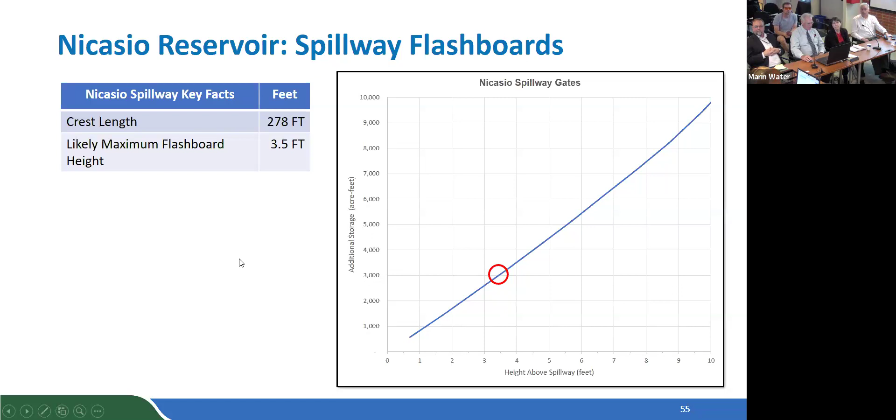Okay, I think it's back to me for the next 50 slides. No, thanks, Bob, that was great for whipping through those. I know it's getting late.

So our summary then is we've got options. There are several enlargement possibilities we're continuing to look at, and we'll come back to you with more information. Exciting are the Nicasio flashboards, if the as-builts and the information around that hold - it's about as simple an engineering installation as you could imagine. Of course, there may still be the permitting side we need to get through, but that is still very encouraging. And the costs?

Yeah, we're talking about big bucks here. For the flashboards? Well, not for the flashboards - 3 million cubic yards and 10 million cubic yards, those are big dollars. Some big numbers. And these are big projects, right? These are generational projects, and we'll get to the cost information as soon as we have it.

But we want to be able to screen these down, and cost will be an important factor in the screening process for us. We're hoping to come back to the board in May to give you an idea of what the range of costs might look like, and to start talking about what that proposed short list might look like. And that concludes our presentation this evening.